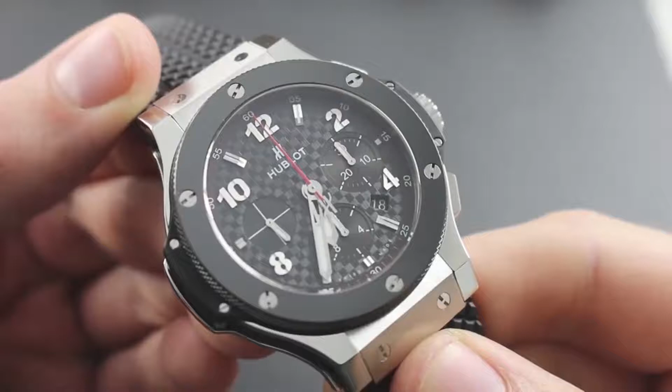I'll be your guide to the proper usage, care, and maintenance of your Hublot Big Bang steel ceramic.

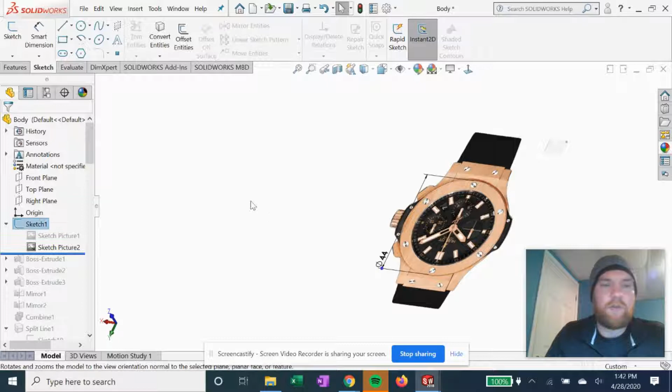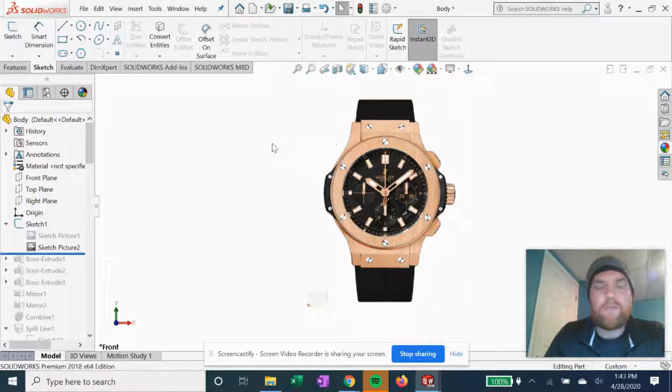So we first start with a sketch that's going to be designed onto an imported sketch picture of just the watch, the front view of the watch face. So we went on Google and we searched the Hublot Big Bang image to import it so we can get our main bezel diameter right here, which if you look at sketch 1,

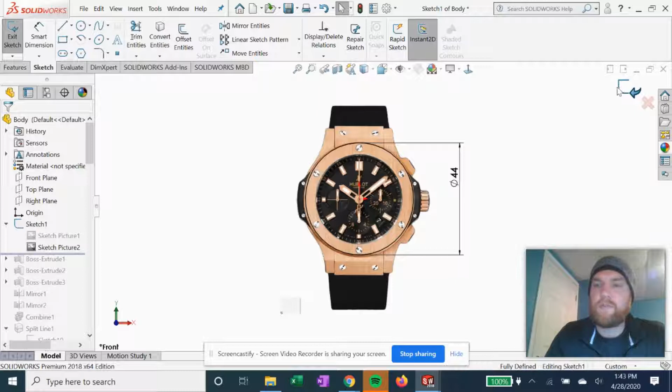we just draw a circle and line it up with the edges as close as we can. We get about 44 mil. So we start with a circle on the sketch picture, and then we're going to set up another sketch for our first boss extrude. Sketch 2 here. Just going to look something like this.

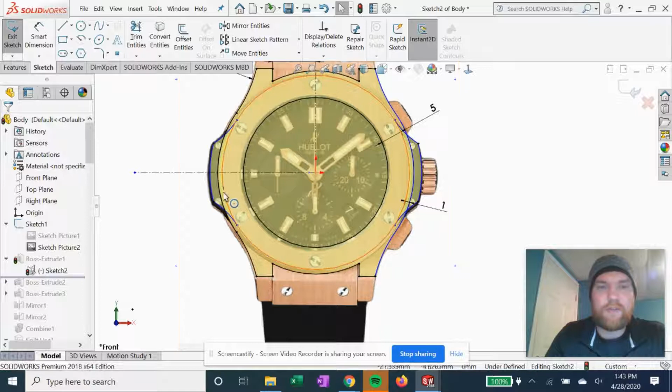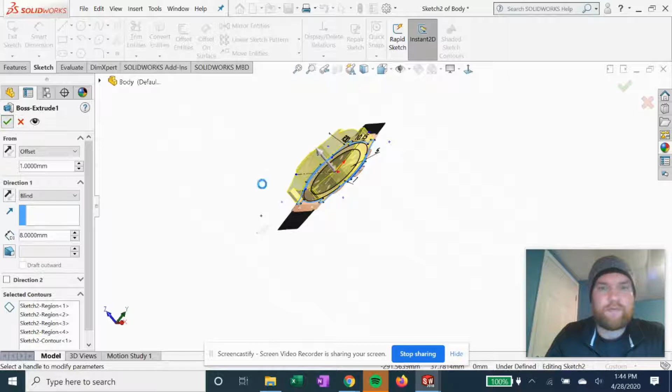Normal view. We're just following some of these edges. We got the bezel outline and wraps around into the wrist. We're going to extrude this up eight millimeters or so. So we got our first extrude.

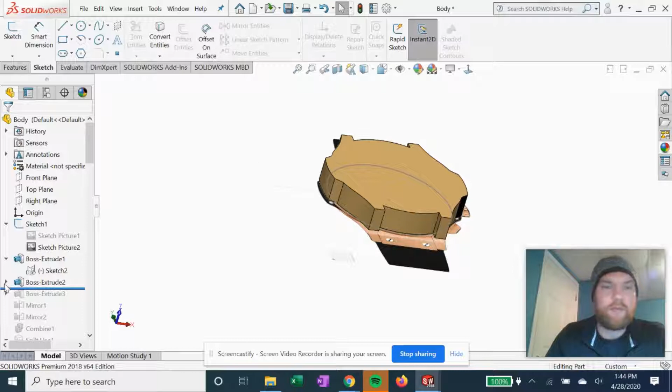Now we're going to move on to the upper lip, which is going to be the sketch here, using the same sketch as before.

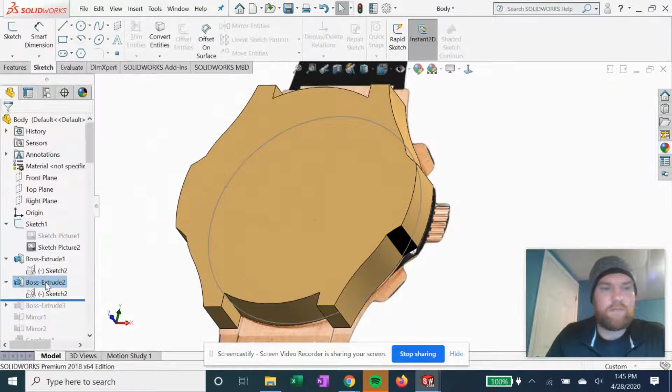So now we got just this inner circle here that we extruded. This will act as the bottom surface where the back cover goes.

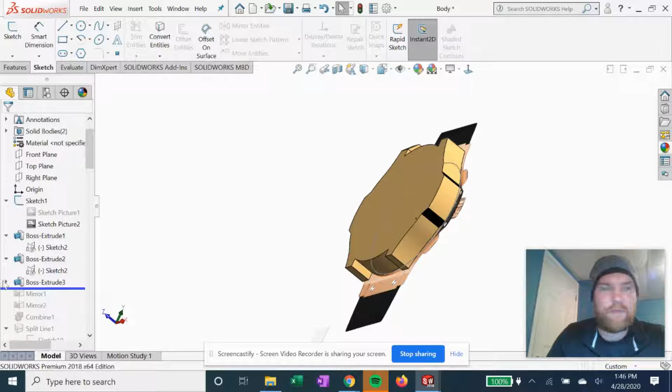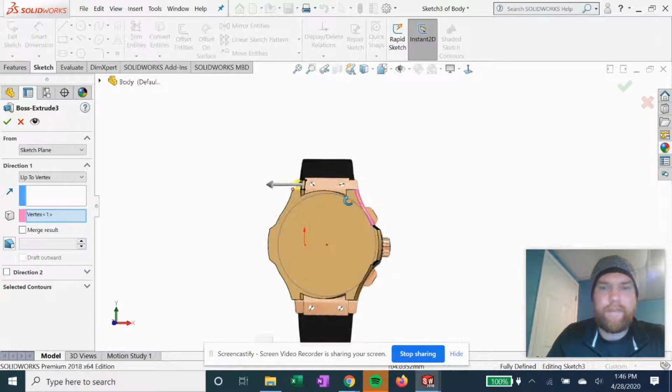So now for our third sketch, we're going to start working on the wrist pieces. So we just have like a parallelogram shaped like that, and we'll mirror it onto that side. So extrude it out from this face to that point, hit OK.

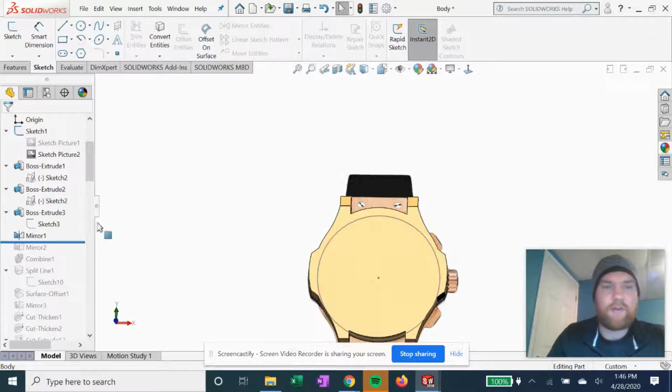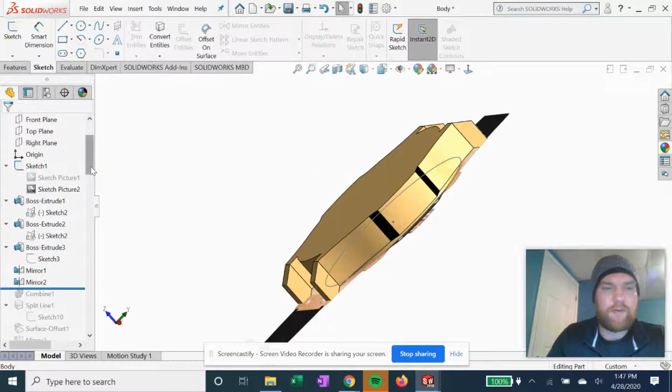And then we're going to mirror that feature onto the other side, about the right plane, like that. And then we can go ahead and mirror both those chamfers onto the other side of the watch based on this plane here. So we're just selecting those two features. Mirroring a mirror. And of course, we'll merge the body.

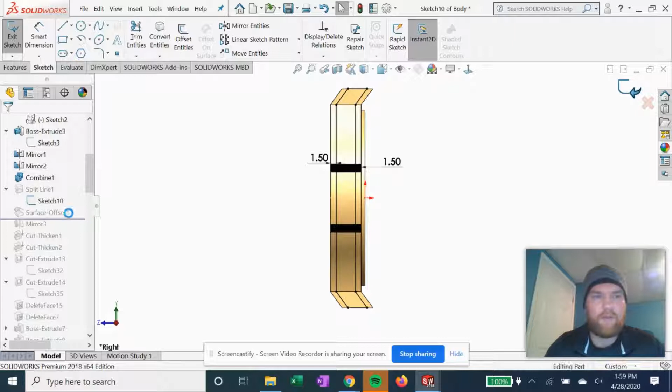Now we're going to add a split line into the side based on the sketch here, down the center plane. Just following these edges. And we're going to make it into the face, these faces here. Hit OK. And we're going to mirror that onto the other side.

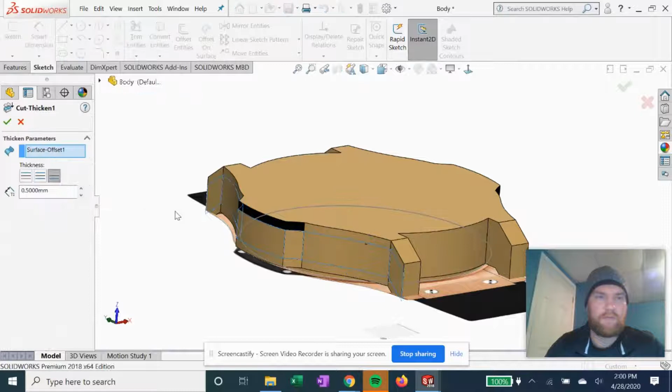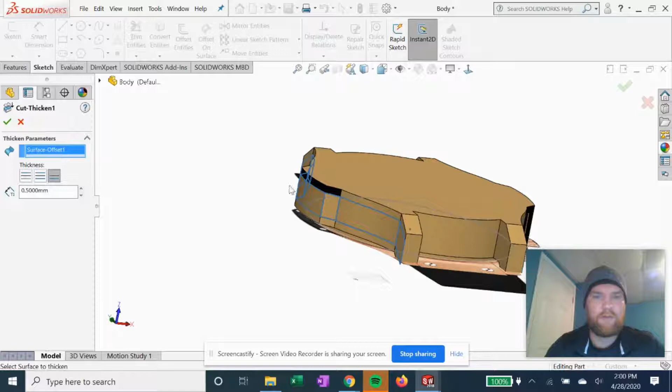We're going to cut about a 1/2 millimeter in based on this side here, using the surface offset. And we can do the same on the other side.

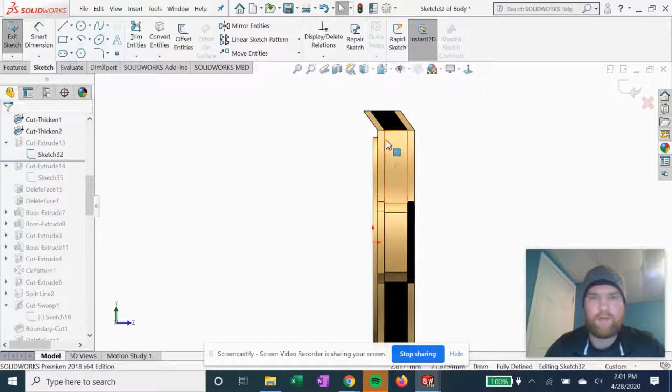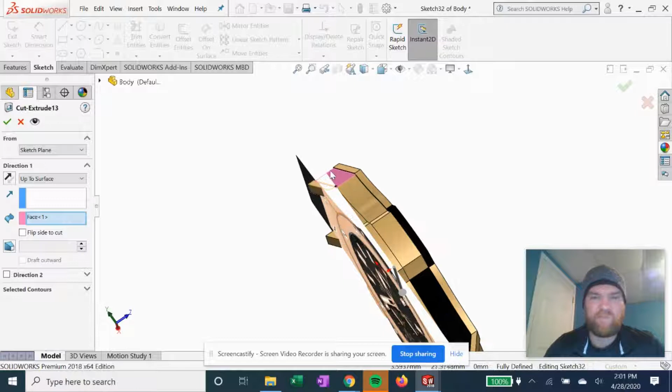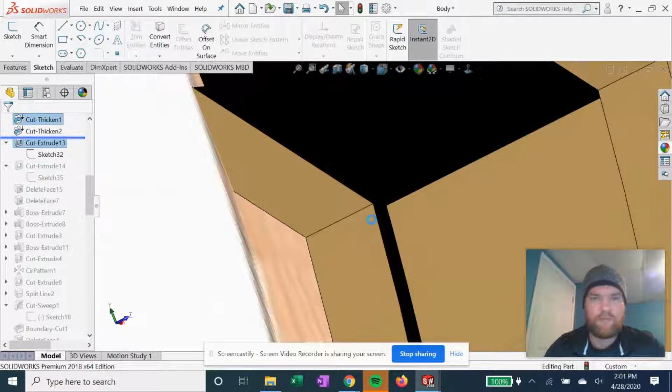We got this sketch down here for this cut. Face one. Trimming that down some. We got the same on the other side.

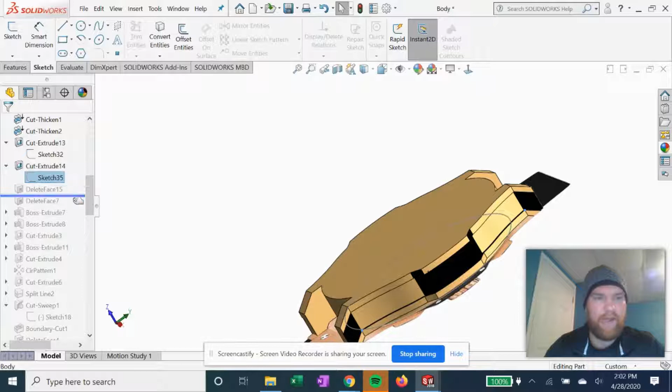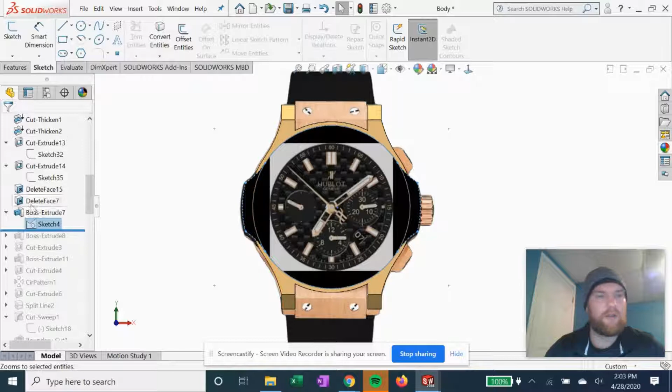Now we can sketch on the top face. You've got this contour here, following these curves on the picture. And we're going to insert this decal for the inside of the watch, the dial and the hands and stuff. And then we're gonna extrude it up 1 millimeter from this face. Hit OK.

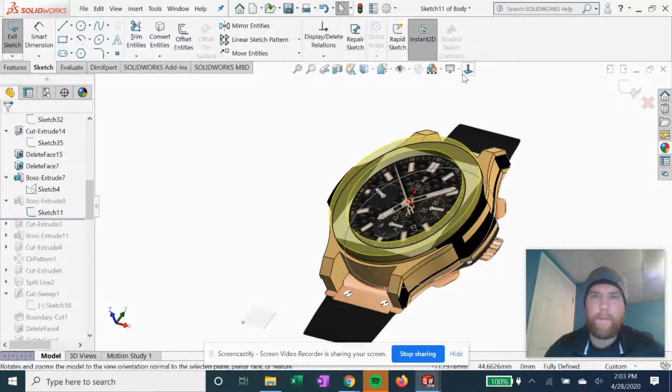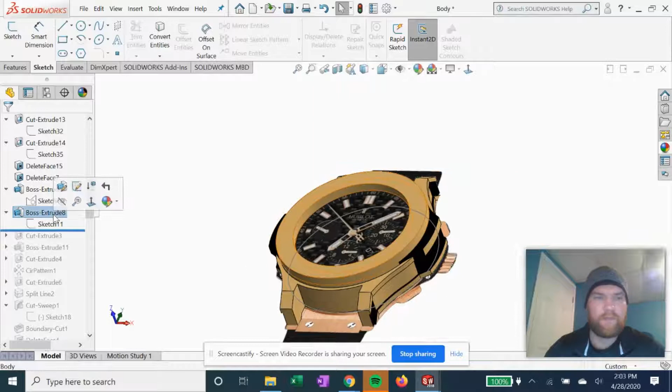Now we're gonna start adding the bezel, just a circle following the picture, these lines. So we got just 2 circles. Then we extrude it up.

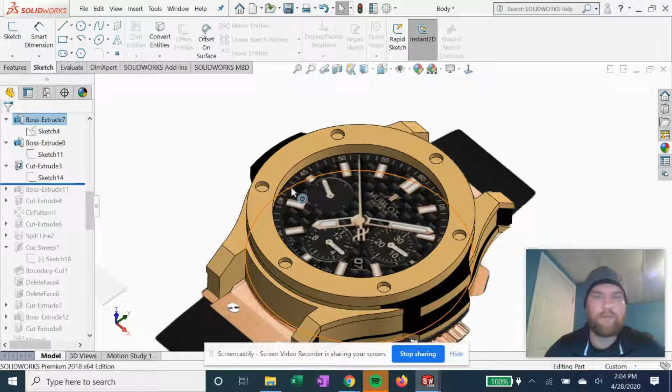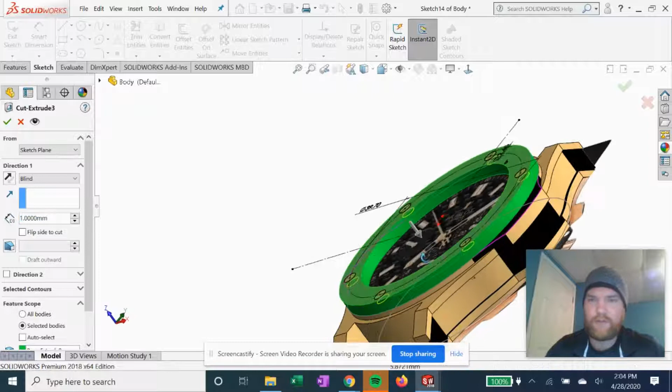Add in our bolt pattern for the screws. This construction circle, and we just place 2.65 mil circles 6 times. Like so. And we're going to cut away some material about 1 millimeter in.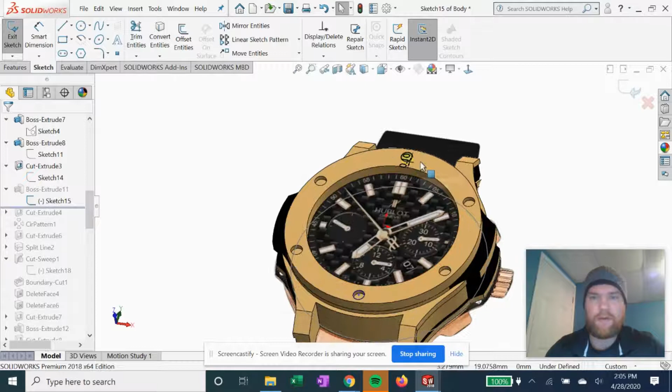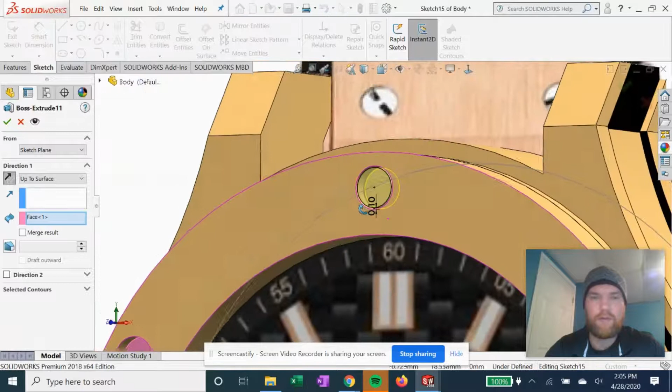Now we're going to start creating the screws and hardware. You could make these a separate part, but for the purpose of this video, we're just going to make it all one part. And we'll do a concentric circle in each of these slots for the screws, and then we're going to just extrude it inward to that face. Hit OK.

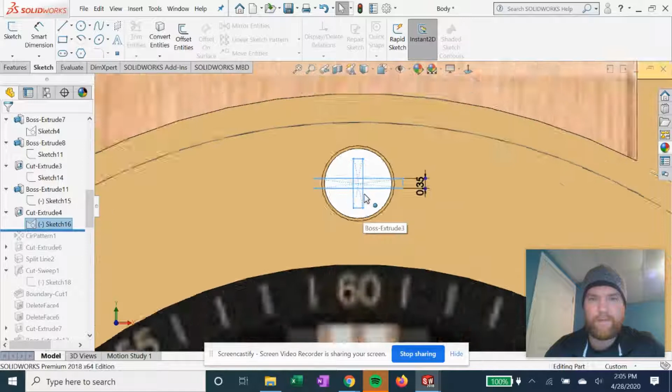Then we're gonna cut out the indentation for all the screw heads using this sketch here. Just 2 center rectangles. And we're just gonna select those 2 profiles to cut. Now it's starting to look like an actual piece of jewelry. We're gonna use our circular pattern for the rest of the screws 6 times.

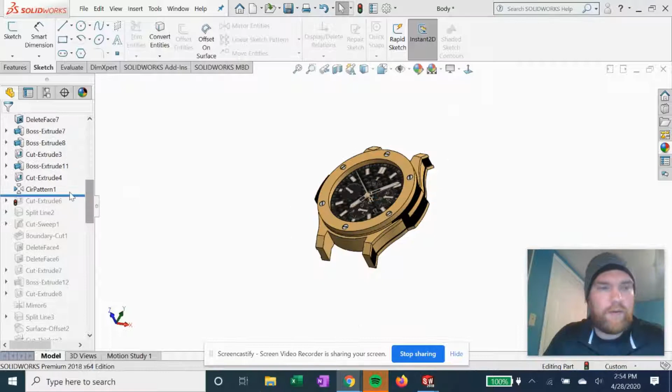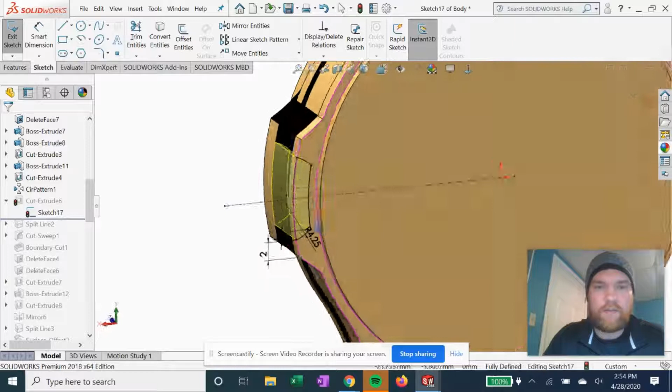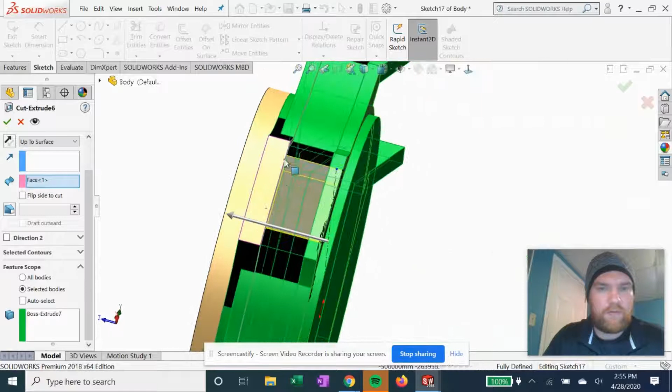Alright, now after that pattern, we are going to cut on the side the spot for the watch dial knob using the sketch here on the bottom face. Cut it. Up to this face.

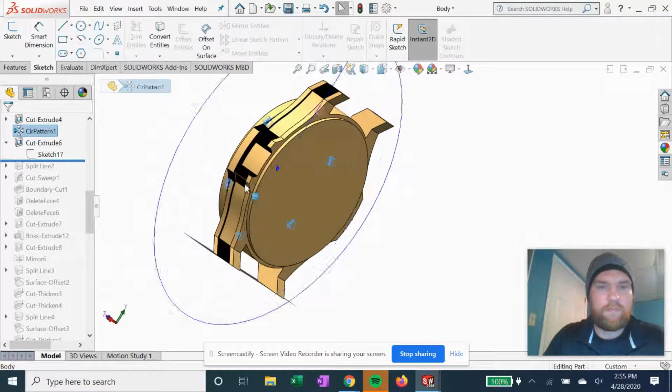And we're going to draw a line for our split line feature. On the center plane using these 2 points. And then we're going to give it an arc, and we're going to split that on this face here. We're going to hit OK.

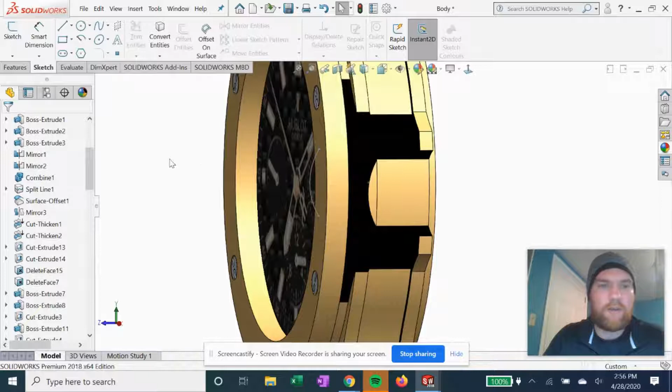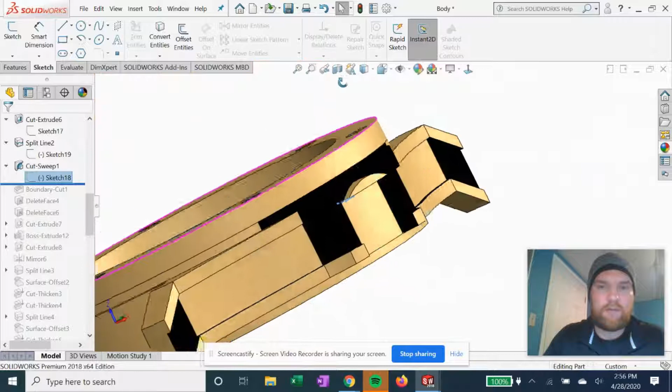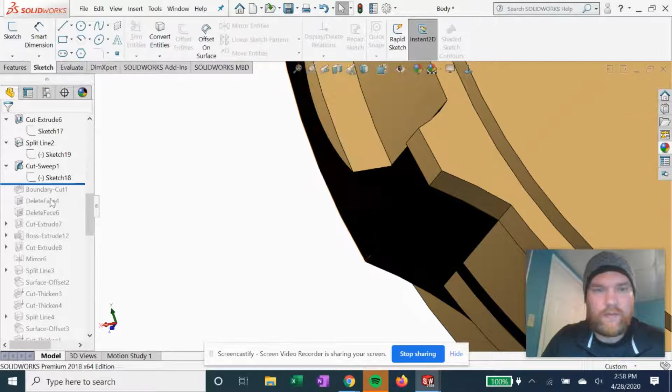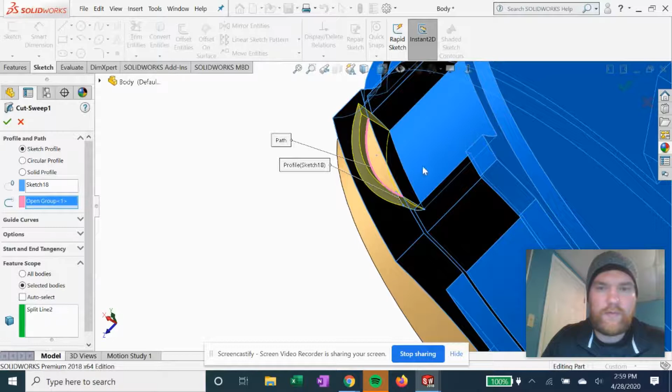We're going to do a swept cut. Make this sketch here on this face. So we got the sketch on this face. Then we are going to use that sketch to do a swept cut. This is our profile. Our path will be split line 2. Hit OK. And we'll have something like that.

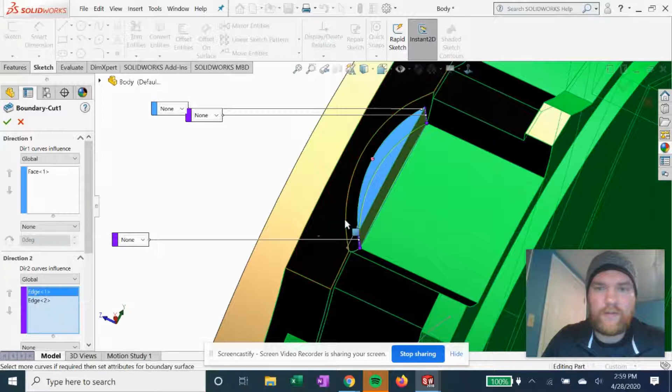Now we can cut the remaining material using a boundary cut on this face and these 2 edges. I'll have something left like that. Delete that face. Make it smoother.

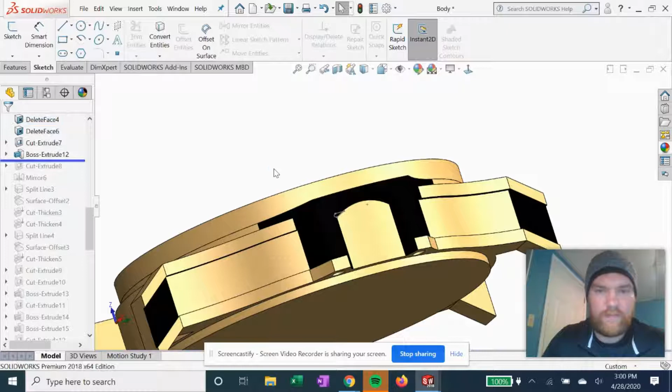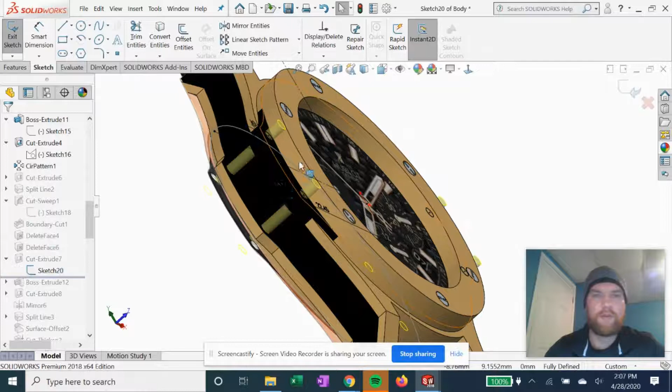Moving ahead, we're going to cut out the holes on the tabs here on the side. Between this line and this circle. Kind of following the picture again here. .65, 5.5 from the center. And we're going to extrude it through.

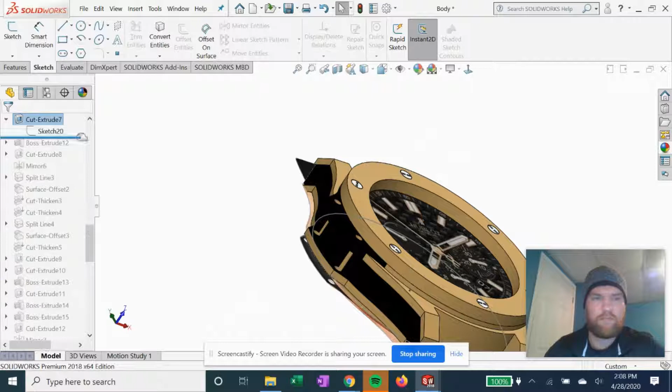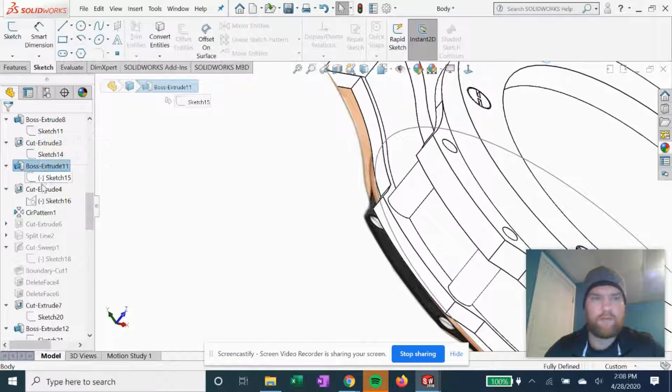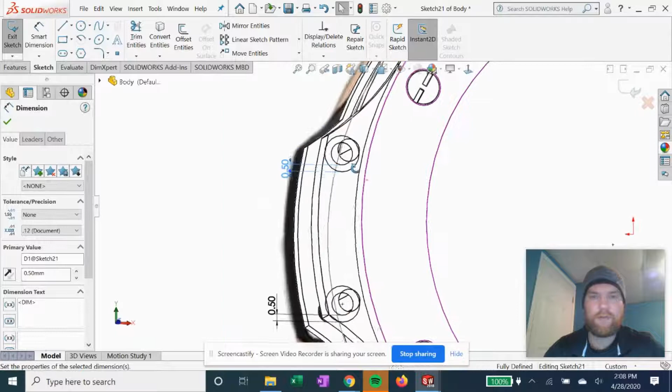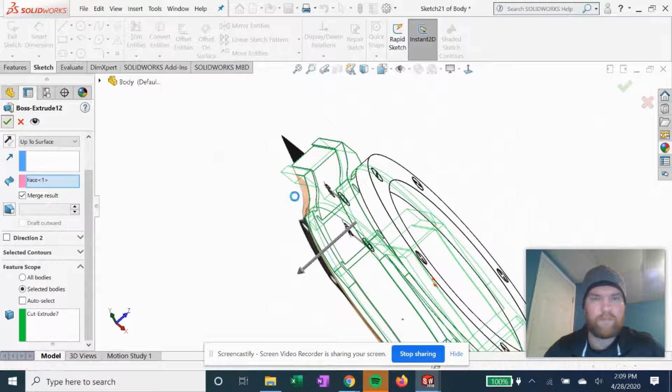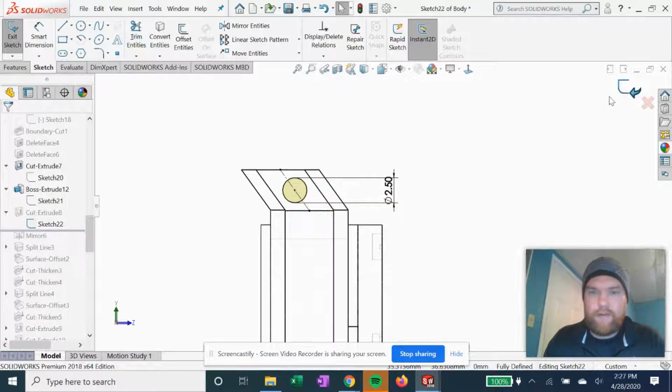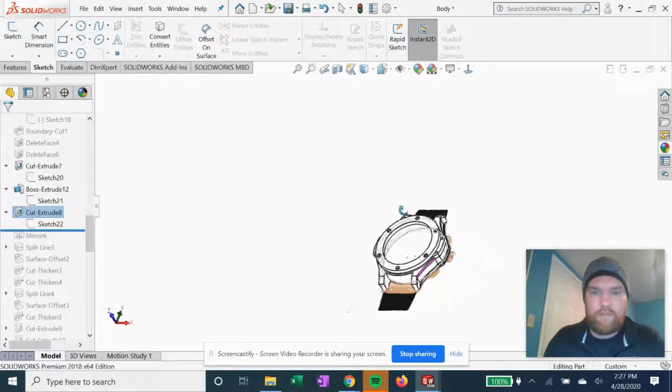Now we got those. So after that step, we're gonna remove some more material for the wrist strap screws. Just by sketching a circle on this face and extruding through. Two millimeters. Let me mirror that on the side.

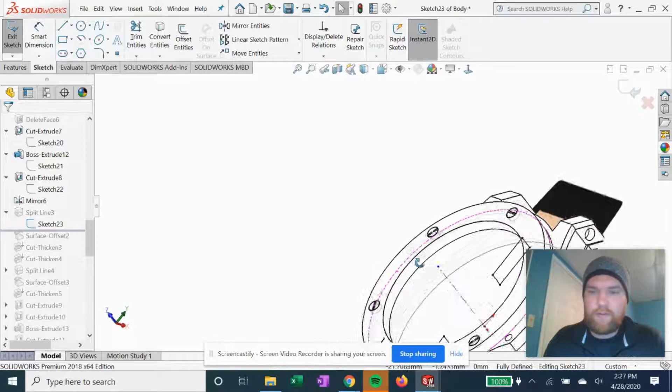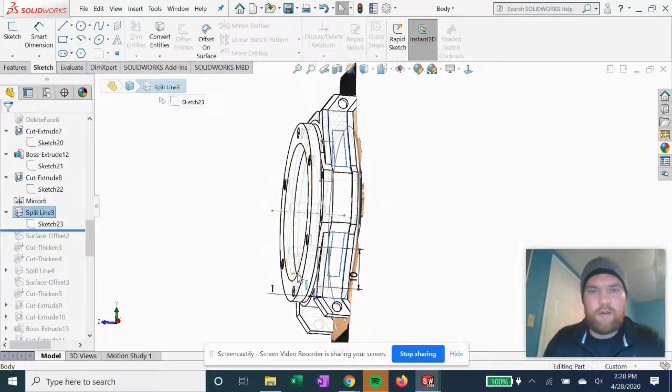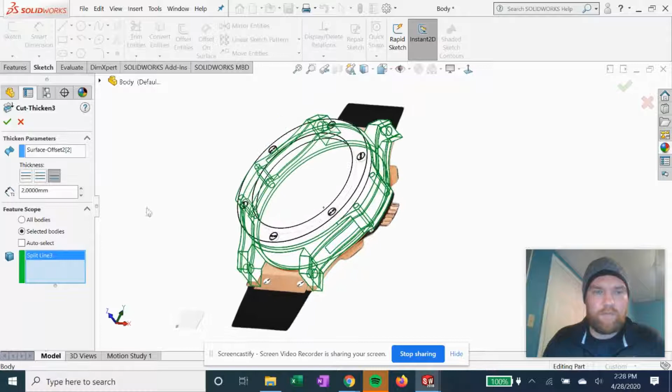We're going to split lines from this sketch for the button slots. So we got these two rectangles. We got our center line here on the center plane. And we're going to split these on these faces here. And we're going to cut material from that split with surface offset, 2 millimeters in. See, now we cut some material away. Same on this side.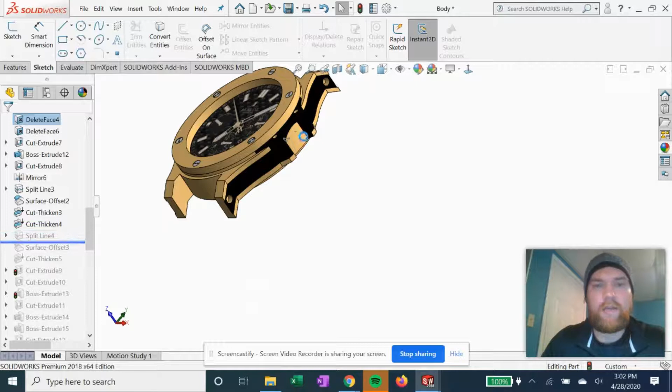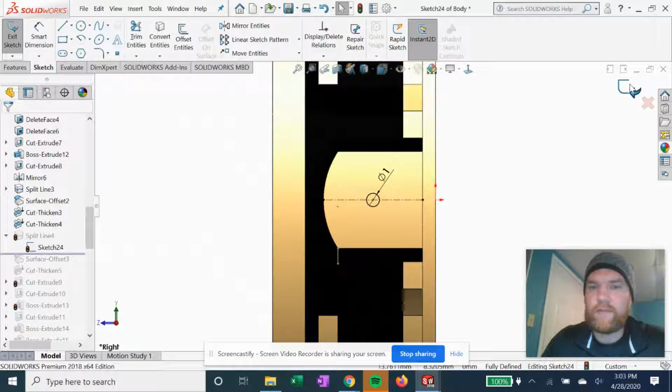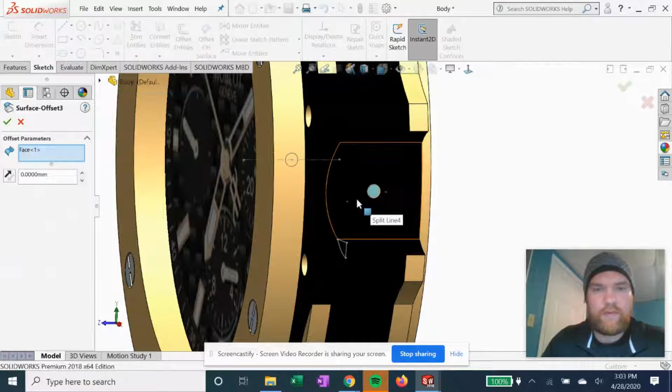Now we're going to add a pinhole for the dial. So we are going to draw a circle on the center plane, right in the center about where this slot is, and then we're gonna split it on this face. Which we will then cut that split line 4 millimeters in.

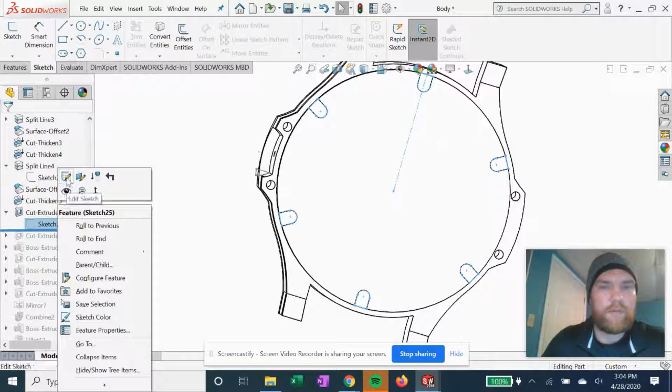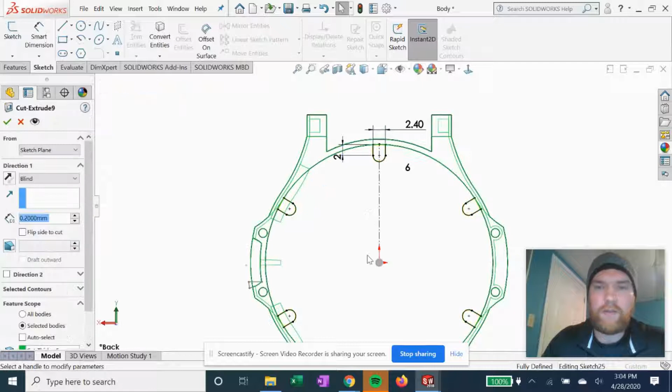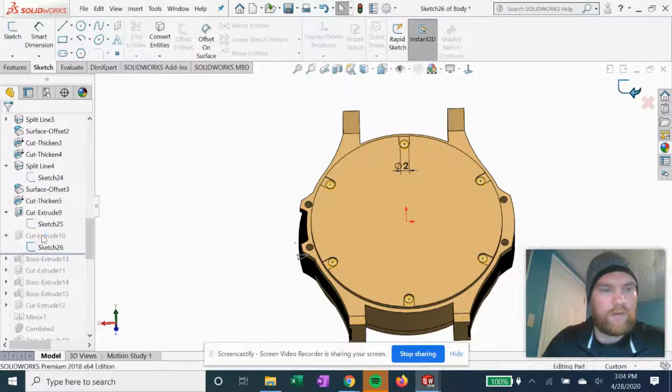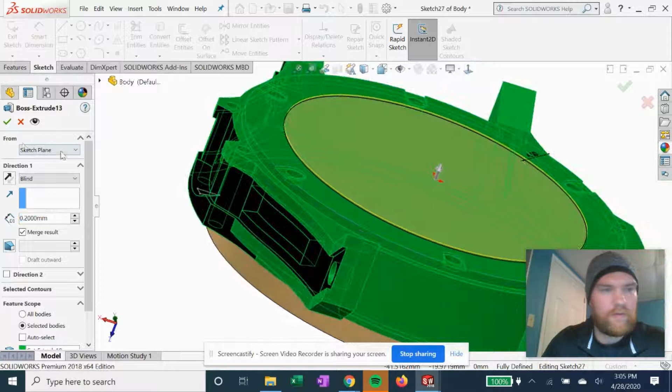Now we can take a look at the back cover of the watch, and this is where we're going to add our cutouts for the screws. So on the back face, we'll be sketching something like this. And lightly extrude it inward. Draw the holes and extrude that as well. Got a slight circle extrusion upwards. Hit OK.

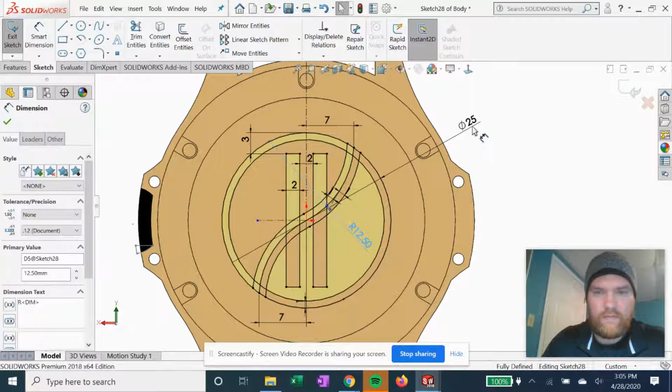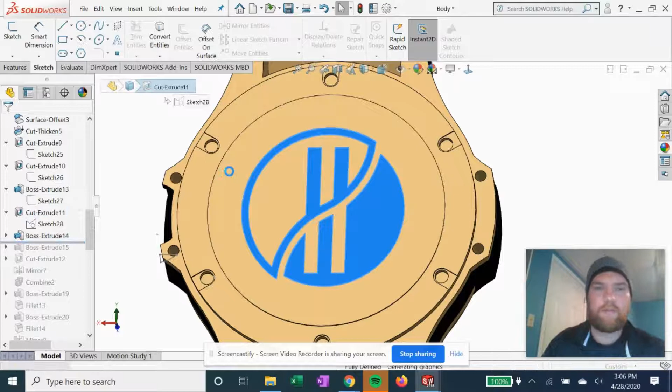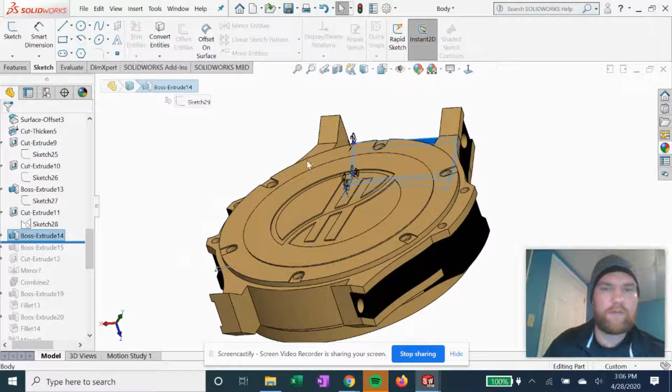Got our Hublot symbol stamped. If you go on Google Images, you can get the Hublot logo and trace it yourself. And we'll just select those lines to cut away. And then we can start cutting this material over here.